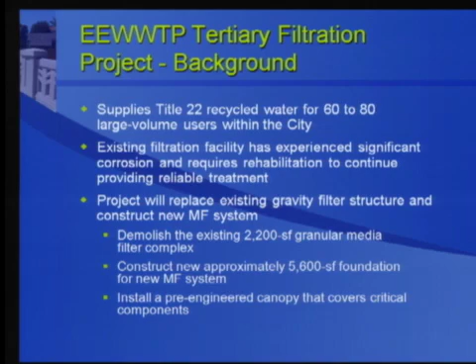I'd also like to point out that to address the comment from the board at the last meeting on September 30th, we are going to provide provisions for solar panels. This is a pre-engineered canopy, so we are increasing the dead load for the roof to accommodate future solar panels.

The El Estero wastewater treatment plant is located in the city of Santa Barbara. We're surrounded by Yanonali Street to the north, Calle Cesar Chavez to the east. There's a railroad right-of-way along the south part of our site, and Garden Street is really the main public access along the west side of our site. Between Garden Street and the El Estero plant is this industrial facility through here, and we'll provide some photos of the site from that industrial facility as part of this presentation.

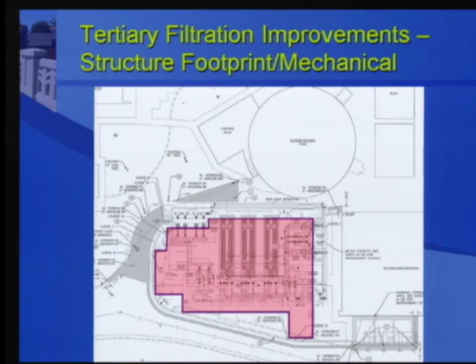This is a mechanical plan that shows the new MF facility on top of that foundation. Again, here are those new feed pumps replacing the existing feed pumps over in this corner. Also, we are modifying that perimeter road or access road to the east of our site, cutting into the curb on the east side and removing some of that vegetation. We'll be covering our process facilities with the canopy, which again will be designed for future solar panels. We will not be installing the solar panels as part of this project, but we are accommodating the load for the future.

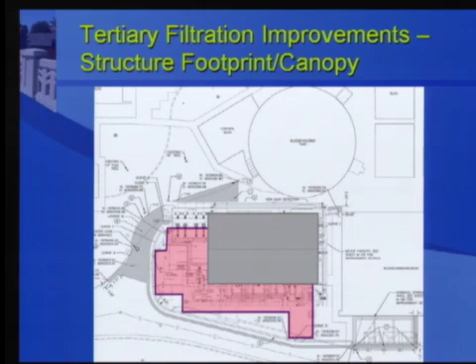One of the requests from our last meeting was that we provide a grading plan. This is what Lisa handed out at the start of this presentation. It shows the foundation as well as modified curb and gutter around our site.

One of the items presented at the last meeting was that we would be using gravel in this area to replace the existing landscaping. We had a meeting with the city last week, and plant operators indicated they would like to have service vehicle access in and around the MF facility. So the decision was made at that meeting that the gravel probably wouldn't provide good service—if it was raining, it would be difficult to drive in there. So we are proposing to replace that gravel with concrete so that we can have service access in and around that MF complex.

We have some additional aerials beyond what we presented last time. This is an aerial looking at a model of the MF facility from the northwest.

The gravel was replaced with concrete paving in and around the site. This is the new vertical turbine pumps. The existing vertical turbine pumps are in this area that will be removed and replaced as part of this project.

Again, this is the existing solids handling building. This building is a lot larger relative to our complex and provides good screening from the south of our site.

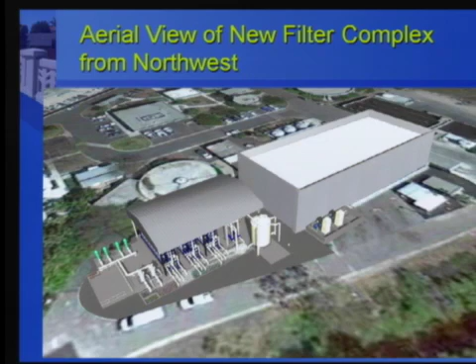This area along through here is the Laguna Channel. We'll provide photos further in the presentation that show views from the Laguna Channel.

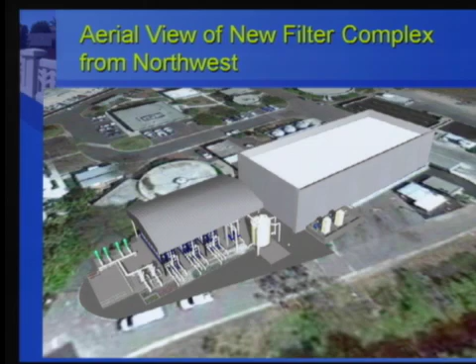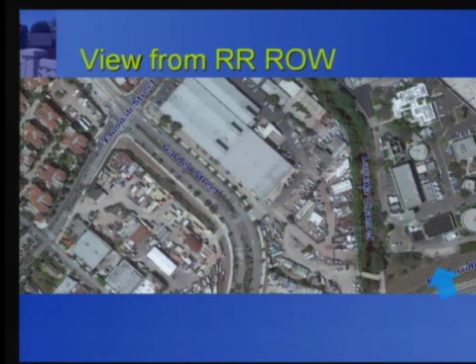The other area where there's potential public view is from the railroad right-of-way to the south portion of our plant. Here's the railroad right-of-way along the right corner of our screen. We've taken some photos looking into the plant. This was a photo presented last time, showing the solids building in the forefront, with a very small sliver of the existing filter complex visible behind it. We've taken several photos from that railroad right-of-way to show how well the solids building screens that filter complex. Really very limited views from that railroad right-of-way.

So at this point, I'd like to open up to any questions the board may have.

So you don't have any architectural drawings that show the four elevations, other than what we saw in that model? No, we don't, sir. Okay, and then in the minutes we had two comments that weren't addressed.

Oh, he needs the lights on, that's what it is.

One was to provide all four elevations, which we talked about, and item four was to study longer roof eave overhangs to provide weather and solar protection, and add more architectural character to the building. How did you address that?

One of the ways we've addressed additional screening from the sun and the light is we've dropped down that roof two feet. So we have the eave of the canopy, and then a vertical drop of two feet. We could only go two feet to maintain access to the equipment, and that's where we proposed additional screening through a roll-up shade or screen.

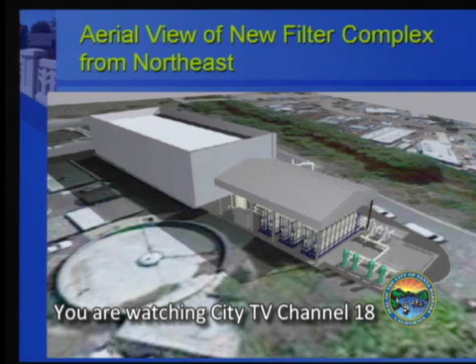Going back through the presentation to the 3D model, this is really the best view that shows the canopy, and we've added that skirt around the perimeter of all four sides. In this area it's dropped down two feet; in this area it's obviously more than two feet. That would be around the perimeter, screening the south, east, north, and west sides of the facility. Leave that image up for a bit.

Anything else for your presentation? No, sir. I will open up public comments.

Is there anyone from the public wishing to speak on this project? Having no speaker slips, I'll close public comment and turn it back to the board for questions of the applicant.

And Howard, I'll go back to you because you had a sound study question. I cut you off, see if I can remember. I've got a question in the meantime.

Did you contact the neighbors across the drainage channel and show them the drawings of the project and get their feedback? No, we didn't show them the drawings. We went on their property and got permission from both the owner and the tenant from where we took the pictures. The owner's response was, I don't think we can see your plant from our property. So we briefly explained it, but we did not show them any drawings.

I remember, you're up. Is your mic on? Oh good, yeah, never mind.

I'm sorry, it's on. The acoustical study—how do you simulate the sound emanating from the new building without actually having the equipment there? Do you know what the noise levels are? Is that a model you do? Yes, the specialist performing the noise study will be modeling the noise as it is now, and then we provided them information on the new proposed equipment, which they'll use to determine whether there are any impacts at the property line.

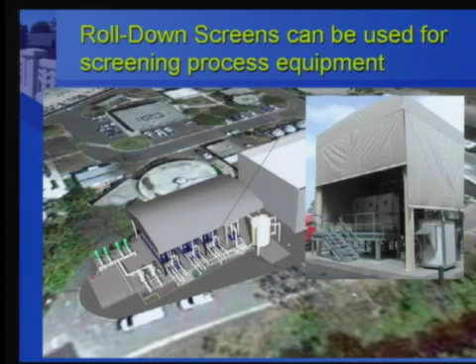There is existing landscaping along the south of this access road that just looks like scrub, along the creek. Is there anything proposed to be added there, landscaping-wise, to screen from the neighbors or otherwise? No, ma'am, not at this time. Our intent is not to go into the creek as part of this project or along the creek bank.

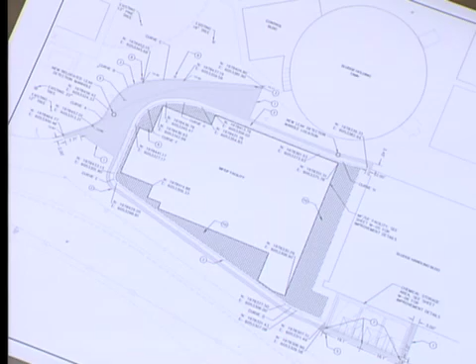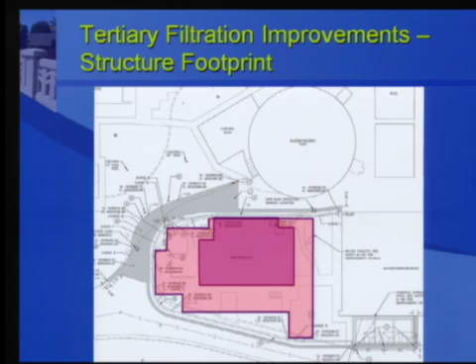Would there be implications to the creek? I'm not sure about the proximity to the creek or the setbacks involved. Our intent is not to landscape the creek as part of this project—we're staying to our project site and out of the creek area. Where is the boundary between your site and the creek? Is it halfway into the creek, or at the edge of the creek bed? Where's the property line? It zigzags kind of funny on this side. Do you have an aerial? I think that shows it better—one of the first aerials. Is the creek a man-made channel or a natural channel? This is probably the best drawing that shows it—right through here, the property line is right at the, just inside the curb line. It does cross Laguna Channel around where it's a little bit barren. It does a funny jog in there. Can we put that up? If we don't have property lines on that side... This is not it. Oh yeah, that's it. That might be it. Okay, Mr. Chair? Let's go to Gary.

I would say I can't make a fair decision today because I really can't review the plan. The presentation was nice, but I haven't had a chance to review the elevations or the height limit—I have no idea, you said the tank could be 5 feet higher. There are things I can't look at and review by just being given the grading plan, and I thought we were pretty clear about wanting elevations in the minutes. The other question I brought up was new pumps you're adding—the existing pumps are there inside a shelter, at the same depth you'll be when you have to replace those pumps and motors. Isn't the access available? Does the roof open up or something? It's actually an open area, so there's no roof over there now—those are pulled out vertically as well, but they've got concrete screening all the way around them. A concrete wall around them? It's a short wall, though, about 3 feet tall, but that short wall currently screens those pumps. Is that correct?

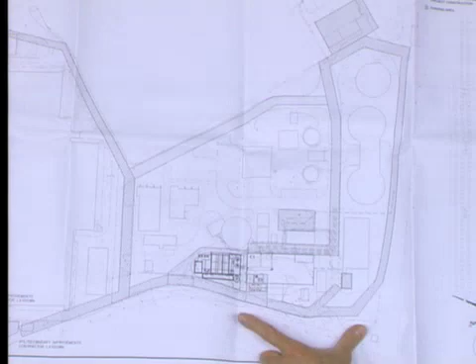And then one other related question. We raised this question and got a rough verbal answer last time, but the distance from this roadway to the other side of the creek where that fence was, where you took photographs, what is that dimension, roughly?

Guessing 70 feet. I think from the top of bank, from the creek on our side to the project is about 44, 45 feet. Oh, to the top of bank? From the top of bank closest to us is about 44, 45 feet to the closest area of construction.

Thank you. I actually had 2 questions. I noticed on your grading and drainage plan you commented that there was going to be stamped concrete. Do you have a color, a pattern? What did you mean by a stamped concrete pattern?

Just curious. This was a decision that was just discussed at our last week's meeting with the city, so we really haven't investigated that to a great level of detail at this point. It would be a natural gray color. Our preference would be not to go to stamped concrete, just to reduce the amount of cost. So our preference would be just straight concrete paving.

Okay, and then there was a fountain that was over here. Is there any history behind that fountain, like why it's located there? And since you're doing reclaimed water, did reclaimed water go through that thing and attract the birds and stuff like that?

I'm not sure of the history of the fountain. I believe it was just brought in by somebody. I don't think there's any great history to it, but I will have an answer for you next time.

Does it work? Is it operating? I think it's just sitting there. Was it ever plumbed? Was it ever? I have no idea, I'm speculating right now, so I'd prefer to just come back with an answer for you.

That's okay, let's go to comments and then we'll move on. Does anyone have any comments to jump in? I do have comments, but go ahead, Howard, if you're ready. Well, I'm not chomping at the bit to make comments, but I would defer to give my time to you to start it off.

Well, I think, in my view, obviously we don't have elevations, so that is an issue. But just in terms of what I saw from the 3D imagery and the photographs, and looking more carefully now at what's occurring between the proposed new work and the adjacent neighbor,

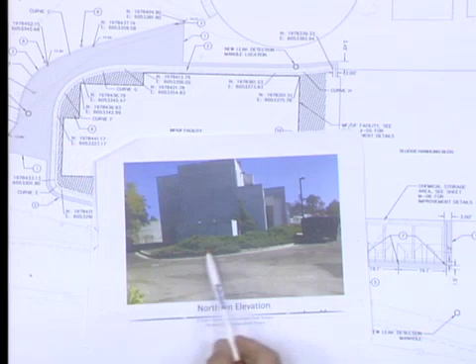I think some junipers would be nice to have there. There's parking right here and so forth. So I think that we should have some landscaping in there, especially where there's not going to be pedestrian or vehicular access all the way around here. There's not going to be pedestrian or vehicular access there. There won't be. There'll be a lot of action right here, I suppose.

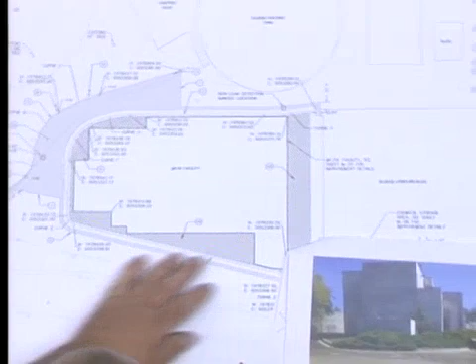And the other thing is I really would like to see the elevations. I want to know how high that tank is and how high it's going to go, if there's a ladder above it. The taller it gets, I don't think it's going to be as tall as this building. That is correct, it's going to be quite a bit smaller, but I still would like to see it. And I'd like to know where the skids are going, and just be able to review this project fairly.

So I'd like to know about the lighting as well. If you're going to add some lighting, or is there going to be lighting underneath the canopy, and is it going to be lit all day and all night, or what that's going to be? So there's information that we're missing, and clearly there's 110 pages of design that you have, so I'd like to see some of it. Thank you.

Anything else from that end of the table, comment-wise? Yeah, I'm ready. I'm not going to add to what was already said, because I agree with what Kurt and Scott said regarding the landscaping over here. I would also recommend you study this access road and the radius of this corner to see if you can actually get a crane to make this weird corner turn.

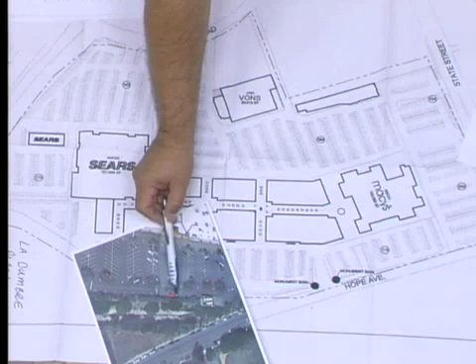Originally the property manager suggested out here, but I was by there today, and in my opinion it's dangerous for us to have a recycling center with this street traffic here, because people will be coming around this corner as they're recycling. Over here there's a lot more space, and it would be a lot better. So I'm in the process of talking to the property manager about allowing us to be in that area, which would prevent any danger regarding customers or our employees. Okay.

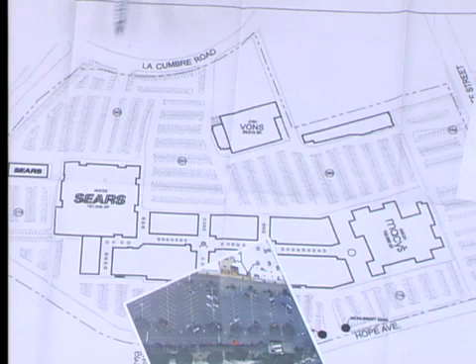Yes, that's a very good question. Originally we would have liked it in front here, and the property manager asked Sears, the owner, and they said absolutely not, because visibility is everything, plus it's safety for our employee instead of being in back where we have cash, and it opens up the door for getting robbed. Then the second spot was here.

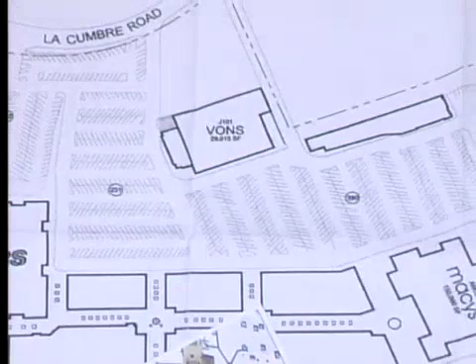I don't know if you guys can see, but it's an enclosure right at Vons and there's really no room. Plus it's really dangerous right here with this street as far as traffic. So the property manager, it was the property manager's idea to place us back there. They feel that's the best place for us to be. We are away from Vons, but of course Vons would do everything they can to let the customers know where we are.

Another question - it seems to be taking up some parking places. Will this create a parking need rather than take parking away? Is there plenty of parking at this existing facility? Have you done a parking study? The staff reviewed it, and it's okay for this building to take up a parking space. Depending on the ABR's desires for landscaping, we might be able to use another space or two. La Cumbre Plaza Mall has a surplus of 3 or 4 parking spaces, so we can afford to lose it.

Okay, I want to go to Howard and then to Scott. I have a question first - is this a compaction thing? The metal, is it metal?

What we have is a compactor on the side of our storefront. We open it up - it looks like a baler, if you will - and we put our material in there, close it up, and press a button. It compacts the material, keeps smashing it down, and then when it's full, we pull it out, tie it up, and put it in the bin. So it's not like the trash container compactors where they push it - it's just a little compactor.

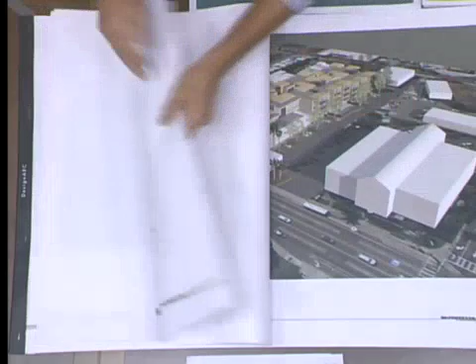But essentially what's happening is this existing building now spans over this driveway, comes back. I should start with the existing conditions. Existing building here that spans over this driveway. There's a second floor that spans over the driveway. It's basically office tenants. There's a stairway here, there's a second exit, and then another kind of an L-shaped return and another piece that spans over this driveway.

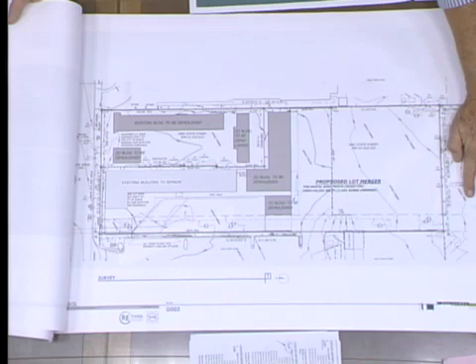This is an easement driveway that is to the benefit of the property behind here, so that they can actually drive out here, in and out, ingress and egress, and get access onto State Street. And then there's a little motel here, a real small little motel that's not really functioning right - a 12 room motel, little motor hotel with parking in the middle. Like I said, there's a stairway here.

So our proposal is to take down the back part of this building and the motel, parking back in this part of the site, and essentially build a new apartment complex in this area of the site that basically comes up and actually touches the existing building.

I think it's important to note that the whole AUD program is an incentive program that was basically put in place by the City Council to encourage the development of projects just like this. It is the average unit density. We are at the higher end of the unit density, but our units could total 811 square feet. Our units currently, as proposed, are 806 square feet. It's all 89 units of 2-bedroom units, so they're very small, compact units, sort of affordable by design.

And I think it's important to realize that, once again, this was one of the sites, along with others in the city, some of which you've looked at, that were identified as the optimal location for this kind of housing, because we're right on State Street, right on the transit line. We have a bus stop right in front, the adjacent property right here. Obviously, once someone lives here in this project, they will be able to walk to shopping, walk to entertainment. It's kind of the perfect location, really.

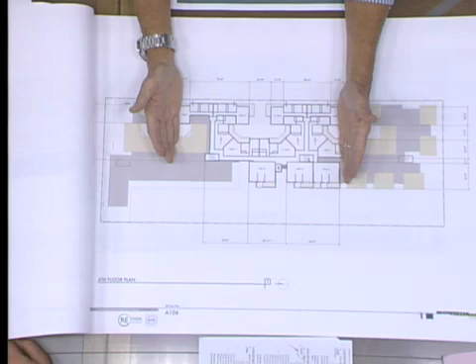We're also proposing on the 2nd floor this common area, west-facing. We're eliminating a couple of units here and having this kind of west-facing terrace, late afternoon sun, with a pool. This is not over the parking—this is actually over grade.

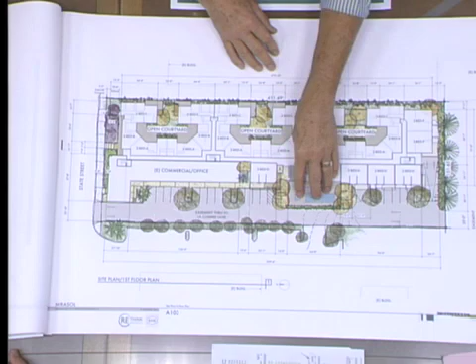There are 2 driveway accesses, so we have two levels of garage. This is the lower level of garage that comes down off the back, and then the upper level on top of that with some tandem.

I'd like to point out that we did this program for Greg in a little over a week—it was a charrette approach to get something in front of you as quickly as possible. We understand there's probably some T's that need to be crossed and I's that need to be dotted on the dimensions, on the parking, and so forth. We've done this before, we know we can get to that point, we know we have the ability to do that. We have enough room—these are fully excavated, basically full basements. And we will certainly have a conversation by the time we're done.

Tandem parking is clearly allowed in our ordinances—you just cannot assign those to different units. They have to both be assigned to a 2-bedroom unit, the 2 tandem spaces. But we'll get into those conversations with transportation at the appropriate time. What we're really here to talk about is the massing of the building. I don't think you guys are that worried about what's going on in subterranean garages anyway, but I just wanted to touch on that so we know where we're headed.

So we've already looked at these plans, and we didn't even get to the point of developing the total floor plan. These little tick marks on here just identify where the bedrooms would be and where the living room would be, so we know we have enough access to outside light and ventilation to make the plans work. We're convinced that we can do that. Once again, in the limited time we had to get something on your agenda, that was the approach.

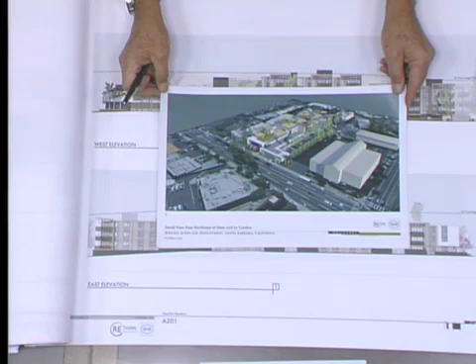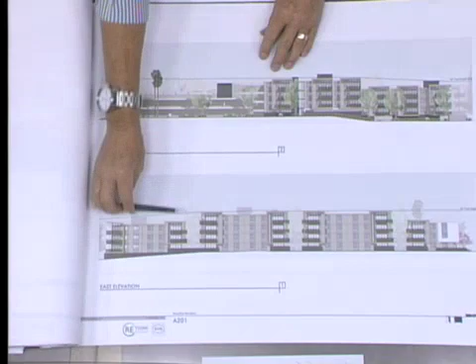But on this elevation, you can see these 3 deeply recessed courtyards, and we've shown those in atmospheric perspective, lightened to step them back. We're using these kind of cowls on the corner to enclose the decks on the upper levels. You can see how we're 3 stories here, 4 stories in the middle, and then back down to 3 in the back.

State Street elevation here. So this is the existing building, just refurbished. There's a very minor change - we're not adding any square footage, we're just kind of cleaning it up. Once again, kind of a mid-century 1960s building, and we're kind of imitating that with our new proposed portion here to the east.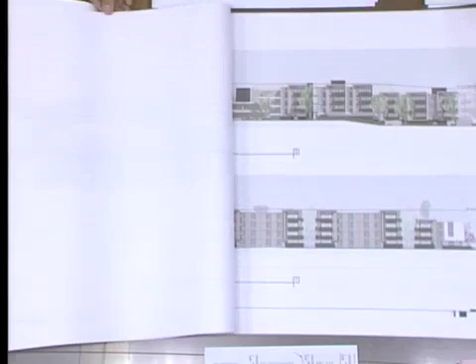Can you show where that outdoor living, that balcony was here or was it here? It's right here, there's a person standing on it. That's the 3rd floor balcony. There's another kind of walk along behind here to get out here, and then there's one that's kind of behind this. We've kind of done - it shows better on the 3-dimensional views. We're thinking it's a kind of perforated screen there that you walk by and it becomes the guardrail for the upper floor, so you get little glimpses of light.

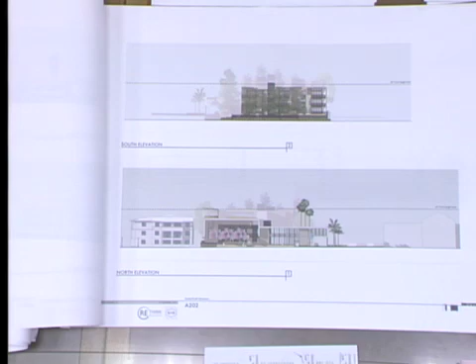And so you get a lot of activity on the elevation without losing privacy, because we're going to have a gate here, a ramp and a gate, so that people who want to come and go could come in right through this area. Like to visit someone could come in through there, ride the bus, get off over here and go right in at that location and get to the whole complex, or people living there could come and go as opposed to the other entrance in the back. The other entrance in the back is kind of next to the pool area - it's right here, and once again it shows real well on the 3D. This is actually guest parking, surface guest parking.

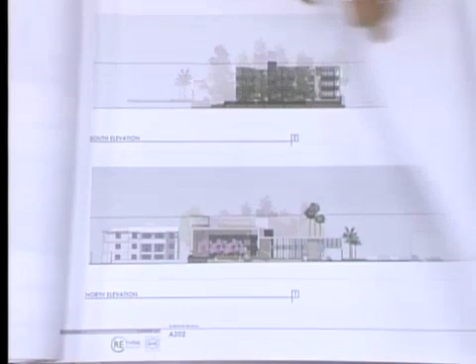We have one longitudinal section here. Apologize for not putting the dotted line on there, but it's the same as this, the long elevation. So it does fit within the 45 feet. See? Then if we go to those?

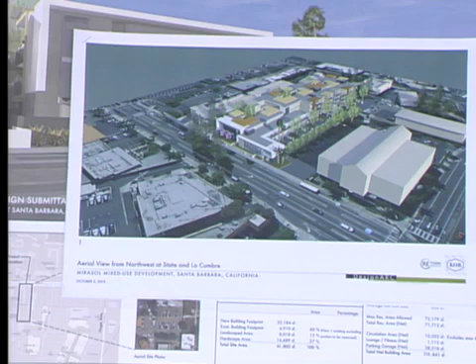So image number 1 is sort of an aerial view with the big building on the corner that everyone knows. In this particular view, Deddy was nice enough to share with us a SketchUp model of his project, so we've done some views with his proposed project that you've already seen on this model, and also some views with the existing church, just so you could see - that's the 60-unit senior housing project going on that site where the church is currently.

This is the State Street frontage again. So here's the existing building. This little box pop out is there. You want to see what it looks like on the site context photos.

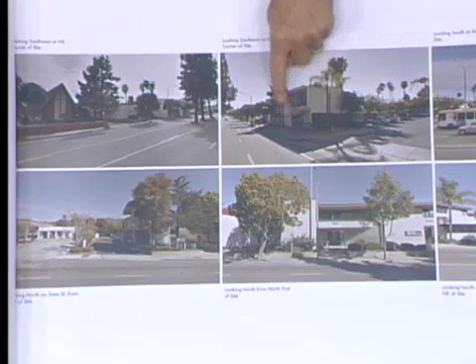That's painted right over there. Yep, we thought we'd paint it in color.

Actually, there's some old 1960s mosaic tile on the front of that building that has been painted over. I'm not going to tell you that we're going to restore it, but I don't want to scare you guys all too much in one setting.

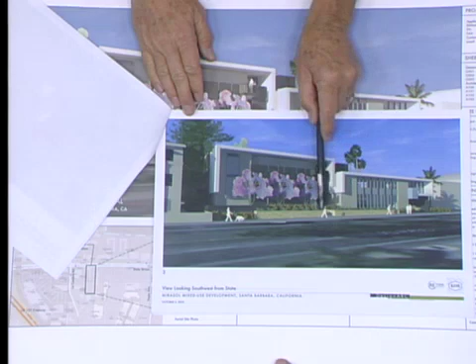So the existing building is just refurbished with the new addition. On another aspect, there were some comments in the guidelines for Outer State Street. When we come back with a full submittal, I think we're going to maybe move this wall back and have an opportunity for some benches for the public walking on the sidewalk. Perhaps we can have the front be a little bit more accessible to the sidewalk.

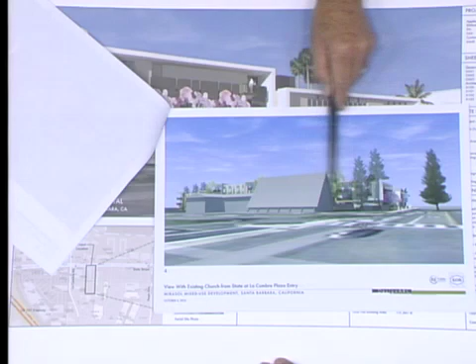Here's the view from down State Street looking up with the existing church. Really, the aspect of the building you're seeing here is 3 stories. It doesn't pop up to 4 stories until it gets behind this church, and then it steps back down. We feel that the massing really fits very well with the site and the existing buildings in place. This is what the project would look like with the adjacent project you guys are reviewing moving forward, assuming it does, so that our building is virtually invisible when that building goes in.

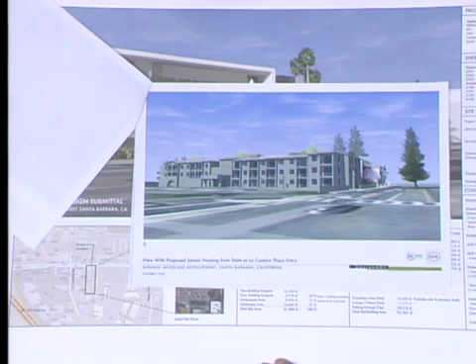But there are two pine trees that we're proposing to retain that are right on the site, right on the property line. They're actually on the adjacent property to the east, but they're so close to the property line that they'll be right in the setback between the buildings, which I think will be a very natural break between our project and the adjacent project to the east.

And the aerial view, once again. This view, I think, shows very well these east-facing courtyards, and those will also get a lot of south light in them as well.

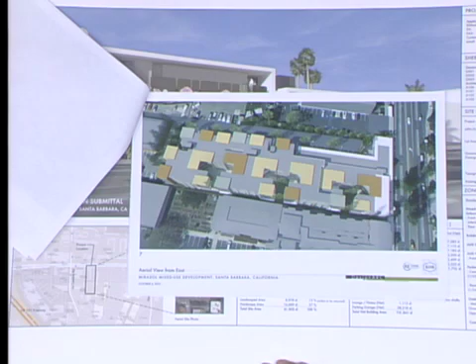The colors that we've chosen on this are very preliminary, but as you move up towards 5 Points, they've used a lot of Eucalyptus citriodora for the landscape and the parking lots, which are nice vertical trees, nice skyline trees. So we're thinking those would be appropriate for these courtyards and some of the surrounding trees, and if we did that, we would base the colors we're proposing on the bark of eucalyptus trees.

Tip knows about that - it's the same thing in front of his office. That may or may not stick for the final concept, but that's kind of the way we would approach it - not just random colors we happen to like, but something that works with the landscape.

It's just a view from standing on top of one of those courtyards, kind of looking out through, filtered through the landscape.

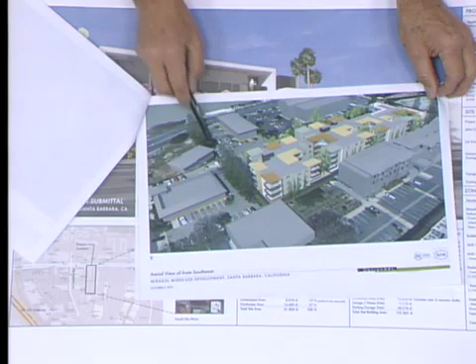There's also a very large stand of pine trees on the adjacent property. Once again, they're not on our property, they're on the adjacent property that we're proposing to retain, obviously. Another stand of them over here behind that gas station.

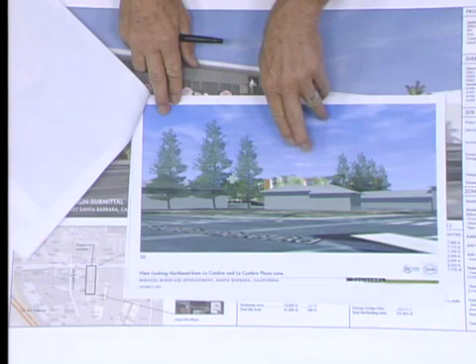So this is the view from La Cumbre, looking up La Cumbre Plaza Lane, and it goes back into the shopping center. This is that gas station that I think you recently saw coming back as a commercial building that's going to be actually out on the site, closer to the sidewalk with parking behind. I think you can see from this vantage point that that building will be virtually unseen by the time you bring a building out to the sidewalk.

This kind of shows how the driveway comes down. We've got surface parking, more or less where surface parking is now on the commercial building. Then it gives way to a little portion where we pop out for the pool. Then there's a grade break here that drops down fairly steep to this lower level, with two driveway approaches and some additional parking here.

This is the view from the south looking up towards the mountains. This is that stand of existing pine trees here.

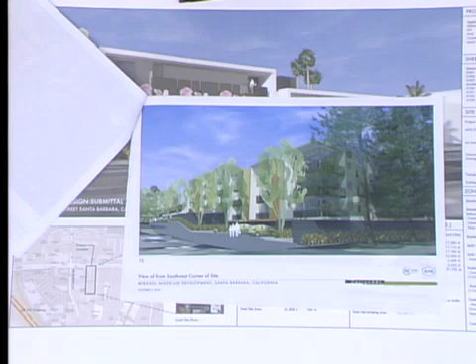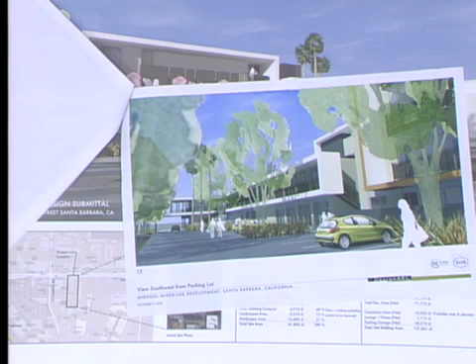That's a little bit of a close-up with the office building. It actually has a roof over it right now and a floor, but we're just proposing to connect that together all the way around and give it a little bit more of a concentrated look.

If I just conclude with one thing, I don't know if the board has seen this document, but this was a charrette done in support of the AUD, and some of the conclusions are: you have to have reduced parking, you have to go to 4 stories, and you have to have a certain mass of building to make it financially feasible to implement the AUD. Through this process, we've found that is in fact the case. So it's really important to me to hear specifically your feedback on the massing, to know if a financially feasible project is possible.

Thank you. Is that all for your presentation? Sure. Great, I will open up public comment.

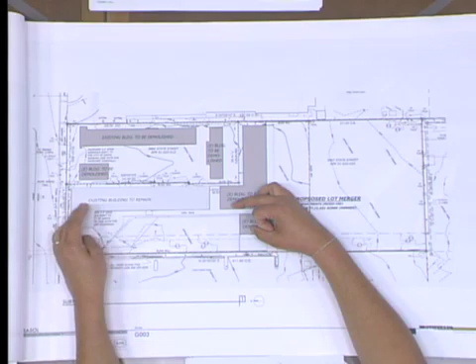Actually, I'll ask a question of staff right off the bat. I'll go to this site plan. So the way the AUD works, I just want to understand how the AUD unit works. You take the overall lot and times it by the formula of 63 dwelling units per acre, and you got your 89 units. You chose to demolish a portion of the existing commercial. Now, they're still retaining some of this existing square footage of commercial. If they chose to demolish this commercial, they still only have 89 units to work with?

Mr. Chair, that's correct. The density limitation is solely based on the area of the units that's privately controlled by the owner or resident of that unit. So it doesn't include common space, it doesn't include underground parking, it doesn't include commercial.

Where I'm going with my leading question is that if they chose not to demolish this existing structure and decided to keep this and this, they're still able to do 89 units with an average density of 806 square feet per unit.

806 units? 811, actually, 811. That is correct? That's correct. So it's to the advantage of having a lot with an existing building to work with and retaining that building, because this is actually retained as retail commercial space that they get the rent for, in addition to the 89 units that are elsewhere.

The retention of the commercial is allowed, and under the new growth management program, there's no small additions allowed up in Upper State Street. So the non-residential development potential actually went down with implementation of the general plan, but with the AUD, more residential is allowed up here.

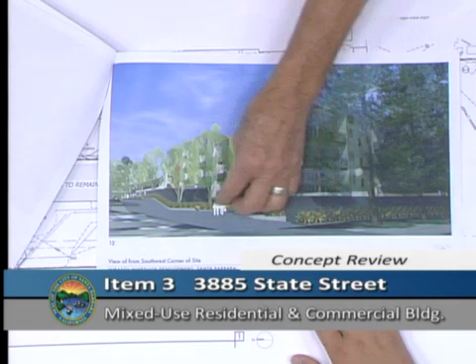It still fits within that, and that level of parking, because it goes back underground, the definition of it is still that it's a cellar or basement. And so this is still 3 levels of housing above a short story that is a portion of that garage. You'll probably see it on the elevation a little bit.

So the bottom level of parking is totally below grade. The upper level of parking is half, partially down. So let's go to that one elevation since we're there.

So we're talking this zone right here. Yep, that parking goes from here to back here. But there's 1, 2, 3 floors. But the garage down below, that's still considered 4th? No, it's actually, enough of it is buried that it's not considered a story. You take the definition of, 50% of the perimeter is more than 6 feet, that definition. So that garage is partially submerged, and it qualifies as a basement and not a story.

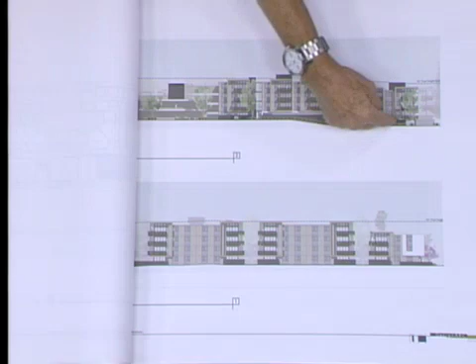So for our discussions, we can approximately say 7 feet between the asphalt and the underside of this thing? Yeah, not a full story. Those are my questions. Who wants to go next?

So back to that question, but visually, you cannot fit another floor because the garage is 7 feet above ground. You couldn't put another floor anyway. Yeah, that's right. That's why you said 3, but actually 3.5.

By definition, it's 3. It's 3 over a basement, and it's still well below the 45. How about a daylight basement? It's not really a daylight basement. That's not our definition, that's staff's definition.

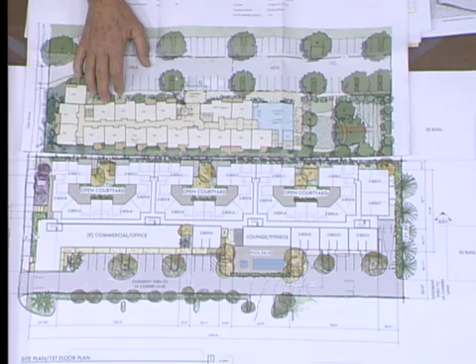The limitations in this driveway easement area—are you able to provide, say, plant screening or planters along that side, like we typically require for around parking and driveway areas? I knew that question would come up, and the answer is no. It's an encumbered easement that runs through here. It has to be the width that it is. So we can't do—the good news is there's a nice planting where we've actually kind of shown what's on the aerial.

And this is the back of that gas station back here. Presumably a new project with the parking back here is going to have that, but the unfortunate reality is that we really can't do much. If we put a new wall there, we could probably do some very small vine pockets and grow ficus vines on it or something like that. But we don't have the ability to put a 3 or 5 foot—

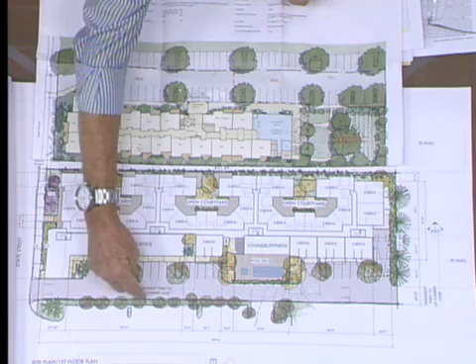But you can't put a wall. You can put a wall on it—there's actually a wall, an existing wall on it right here that holds this second floor over. And there's another one here, and there's actually a wall all along here that we intend to kind of enhance. And once again, this tree cover does a really nice job along this, but I think we would probably propose to do some vine pockets and make that into a total green wall for that very reason.

I think those are my questions. Yeah, can I ask some questions? Go ahead, Tip. I'd like to ask some questions about the concept, the open courtyards.

It seems like you have 3 courtyards, and who can access the courtyards? On the ground floor, all the residents—there's 1, 2, 3, 4, 5, 6 residents on the ground floor that access that courtyard. On the upper floors, we have the balconies that look down into those courtyards.

So that means the second, the third, the fourth floor are just looking down to the courtyards. That's right. And the way you approach all the units is from the interior corridors. That's correct. And then everything opened up to the courtyard. That's right, because it's an elevator building, all of the units are required to be ADA accessible and adaptable.

So that way these can actually—but down here, you could actually have some steps if the grading works out, such that you could actually kind of have a little stoop on the open space on the courtyard side, because their ADA access is from the back. Yeah, Stephanie.

What is the regulation for the solar access ordinance for AUD projects?

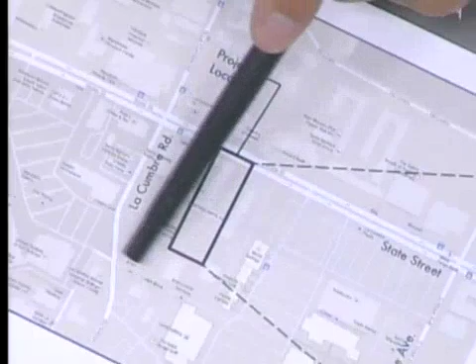This is accessible all the way through to La Cumbre Road. If you go back to La Cumbre Road, that's where the AT&T store is. On the vicinity map, here's the subject parcel, here's La Cumbre, and here's the gas station. The only way to get to the back of this is from private property, that's not a street, that's a driveway, and it goes by the AT&T store.

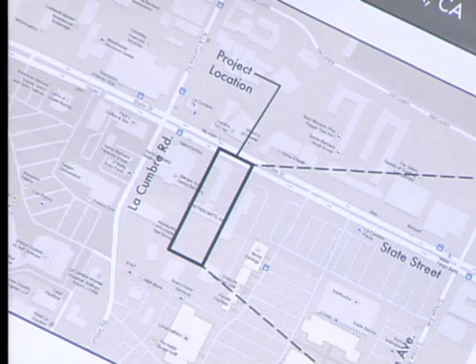So there's no way from these buildings along La Cumbre Road to get access onto this? When Barry Burkus developed this, he granted himself an easement, which is right here. So that project, the Galleria, has access to use this as well, at this location. So that's going to remain.

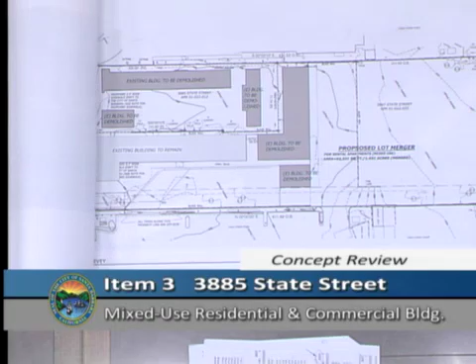How much parking is dedicated to the commercial space in this one? It's about 36 or 37 spaces, at 1 per 250 square feet of remaining area. Of course, we'd have the added benefit of overlapping use in the evenings when the offices are closed, which would be available for additional guest parking for the residents. That's it for my questions. Thank you.

Howard, do you have any questions? Yeah, I'll go up and then I'll go to these.

Could you please explain what's happening on the State Street facade, both the existing legal non-conforming setback of the existing building and the proposed setbacks of your building? Not the eyebrow, but the face of the building - is that a 3-story face, and is it one setback for all 3 stories?

Right now, there's going to be a 3.5-foot dedication that we're losing on the front. We're providing a 10-foot setback to the face of the balcony, and right now it's a 13.3 foot setback to the face of the building. So we're losing 3.5 feet all the way across the front. The existing building is at a 6'3" setback from the property line, and that's going to remain.

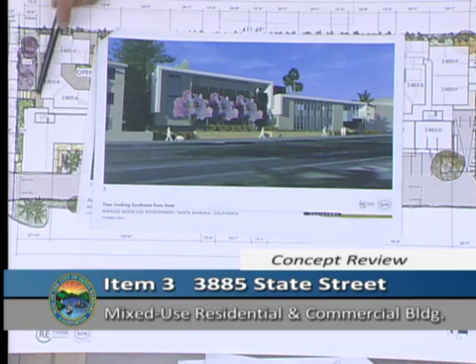So what we're proposing here, and we could more fully develop this, is we want it secure enough that people walking on the sidewalk can't just jump over this rail and go back into the project. We've shown maybe some steps, and we'd probably have to develop a handicap ramp - we haven't got to that yet - but there would be an entrance point with a keypad entry, so you could get in and go up the stairs, or walk down to the elevator and go up anywhere in the building. So there are 2 points of entry, one here and one here.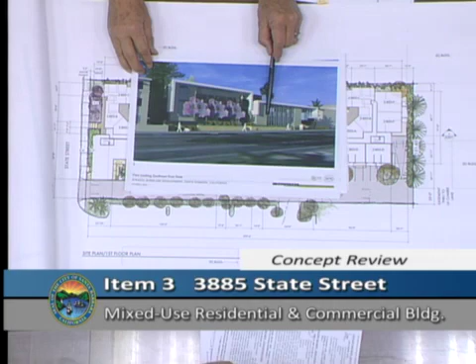That face is 3 stories high. The existing building is really a fairly tall 2-story, with the lower floor at about 11.5 feet. We're doing 9 feet, so our 3-story here is not significantly higher than the existing building, but enough to have a nice architectural break between the two.

So the proposed building is the same setback on all 3 floors? Yes. And the Eastern block is a little bit ahead, a couple feet. Correct, and the balcony too. I see.

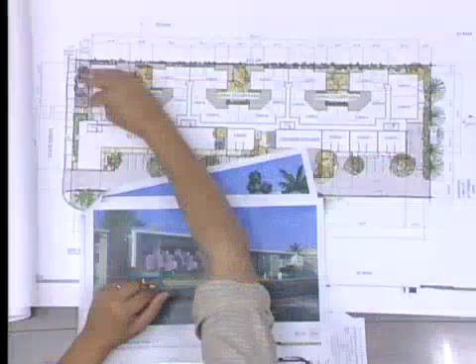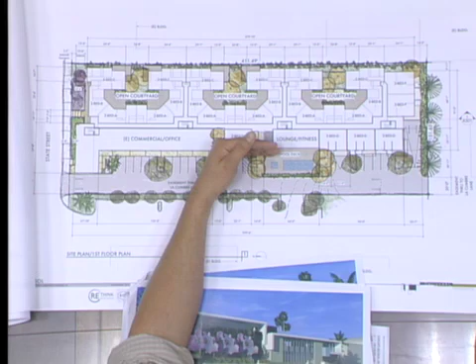Another positive is the massing, in the sense that you were 3-story, up to 4, down to 3. The one concern I have is the 4-story units along this end creating a very tall vertical wall here. It's just something we don't see yet in Santa Barbara. There might be a couple isolated things, but looking at the 4th floor, no one wants to see you lose the units, because that's potential profit or potential housing units, or actually 3 less cars on the 101 freeway because we're providing housing instead of in Ventura.

But this becomes a 4-story vertical wall here and here, with a pool below. So the direction I would like to encourage is to lose these 3 units and create that kind of setback here, like you have at this end and at this end. I'm not too concerned about the 4 stories here and here, because of the massing of the other building and relating to the other neighbors.

So it's a well-designed project. You explained yourself very well. The thing we'll be looking at is to try to keep it Santa Barbara as much as you can, and I love the fact that you had some Santa Barbara sandstone along here. You probably got Gary's vote that way.

So those kinds like of... deja vu all over again, isn't it? But you see, we never had to say it. You just actually threw in the sandstone. It's like, oh, it belongs in Santa Barbara.

So, mildly, somehow I think there's something wrong in the math, in the fact that you get to retain so much of your commercial space and keep 89 units, and that if you chose to keep this commercial spot, you still would have had 89 units.

It's our job to beat back the aggressiveness of these projects and make sure the scale matches our community. And the massing is the concern that I have along this realm, and anything to pull this back anymore would help. Those are my comments.

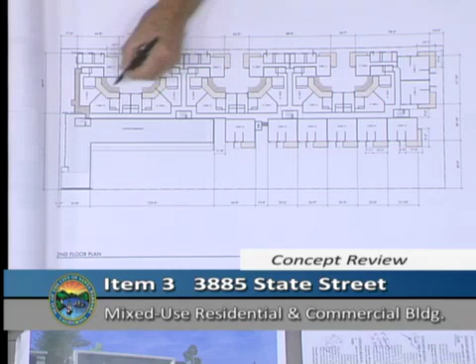Quick question on the second floor - is this just a drafting error, or are the balconies really... No, that's just showing the terraces down below. Gotcha. There'll actually be a fin dividing, because those are two units.

I think the general parti is very clever with the interior courtyards, and I like the notion that they're very well landscaped. Hopefully there's enough light getting down in there. On the whole, I'm supportive of the project. Thank you.

Gary? And then we'll go to the other end. I'll be a little opposite.

I really don't think that the three-story works. I think we need to consider human scale, and the walkability of this part of town. Rather than saying we're just a little bit taller than this building, we should have said we're just a little bit smaller than the existing two-story building. Rather than make everything bigger, perhaps we should have made this a little more diminutive than this building that's oversized.

But you went the other way, and went a little bit larger. I have issues about the massing of this. I think there's light and air issues with how these units are going to work and how tight they are to the proposed building next door.

I was looking at some of your drawings, and I'm noticing that there's no fenestration at all on what I guess we'd call the south side, as it comes into this building right here. It seems like there are opportunities for light and air.

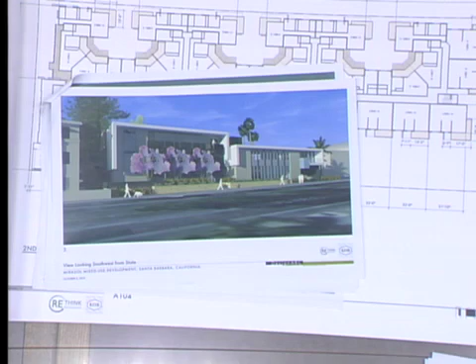The State Street guidelines, I think, should be adhered to a little bit more. I'm concerned with this - we're talking about the balconies, but in reality, with the building protruding all the way down almost to ground level out here, it still looks like the whole building is set forward. Even though you say the wall is back 15 or 16 feet, it really isn't, because of so much projection that's out. I'm concerned about that.

I'm concerned about this walkway being directly on the sidewalk without a landscape buffer, but you did mention you were planning to maybe move that back, and I'd like to see that. I'd like to see a little more human scale elements to it, like I was saying earlier - it does seem very large to me.

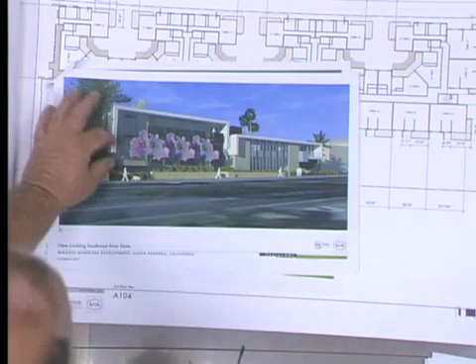I, for one, will be looking for reductions. So, thank you. Howard? And we'll end with you.

I think this project is well designed - it epitomizes what the AUD is really all about. It is in a good location, close to transportation, shopping, work. All those reasons are good.

My thing with the AUD - I support the AUD, but I also think that although that's a statute, our purview is really to make sure this has a size, bulk, and scale that's compatible, that is human scale. So there's somewhat of an override in my mind of the AUD with our design guidelines. I don't know what those are yet and how they impact this project.

The idea of making the two buildings sympathetic to the 1960s, I understand that, but my preference would be to make them more contemporary. They are pretty contemporary as they are, but I think the hood that projects over State Street is a little much - it kind of overshadows, creating a dark shadowy recess, ominous, as opposed to having a facade which is sunny and light.

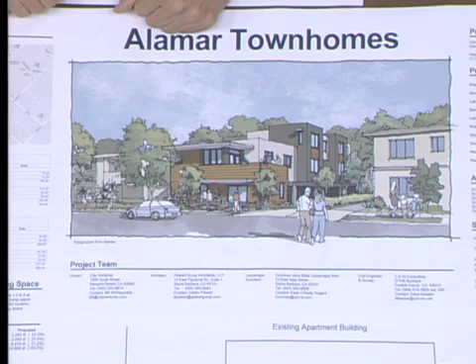Mr. Chair, board members, we're back to share with you a change that we made to the project. I have little packets here that just show what the previous design looked like, for reference purposes. So primarily, what's happened is that we had several meetings with city staff to discuss the project, and one of the issues they wanted us to take a closer look at was the setback from the top of the bank of the creek. You'll recall that previously we were adhering to a 25-foot setback, and there's a line on these drawings showing where that 25-foot setback is. They really encouraged us to look at whether we couldn't increase that setback to 35 feet.

Before we go forward to the Planning Commission.

So what we did was we took a look at unit number 4, which previously extended out an additional 10 feet there, to see whether we could come up with a 3-bedroom unit that would be 2 stories in height. The way we approached that was to basically take out the 2-car garage we previously had, and provide a 1-car covered garage, plus an additional parking space adjacent to the 35-foot setback. That's how we were able to continue to have a 3-bedroom unit, which is very important to the developer.

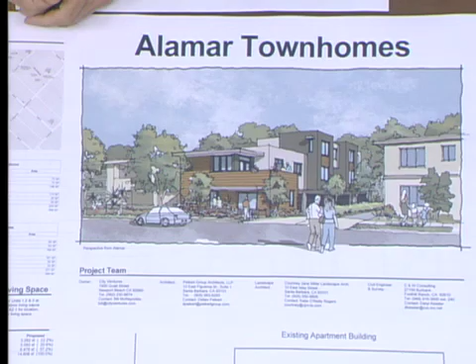As you know, these are all affordable units, affordable to moderate income buyers. But we felt that we could live with the 1-car parking garage as long as we could add an additional parking space, which we were able to do, and we have sufficient room to do the maneuvers to turn the car around so it comes out of the driveway front first.

The unit's habitable space is around 1,250 square feet. So I'll just walk you through what the floor plans look like and then the elevations.

Over here you can see the ground floor plan with the living and combined kitchen dining area, a stair in the middle, and a little powder room as well, with the entrance immediately adjacent to the garage. One of the things we're doing is providing some outdoor living space adjacent to that parking space, with a sliding patio door that provides access to it.

On the second floor, you can see the arrangement of the 3 bedrooms: a master bedroom with closet and ensuite area, and a second bathroom for the other 2 bedrooms adjacent to it, with a hall, stair, and the usual washer, dryer, and linen setup.

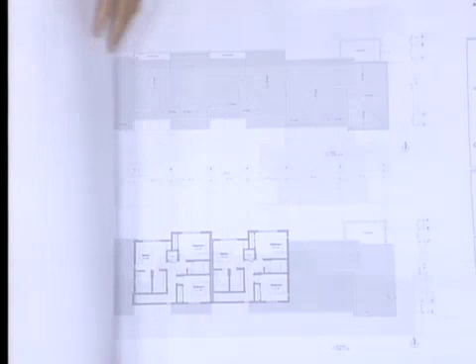The remainder of the project has not changed, but here with the elevations you can see how they've been affected by this change. I think you can see we've maintained the overall character, the contemporary styling of the building, with a combination of stucco massing and clapboard siding on some components, and an aesthetic arrangement of the windows, etc.

Back here you can see how we have that patio door adjacent to the open space that now would be adjacent to the parking space, again working with the arrangement of the fenestration elements, etc.

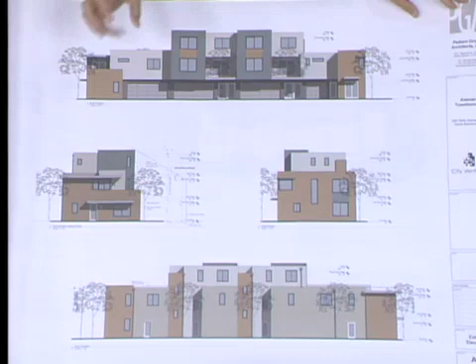I guess you can see all of the elevations there. The back elevation, same thing: the siding kind of wraps around the back, again breaking up the mass at the rear of the building.

Then the landscape plan - Courtney will talk about that. So the changes to the landscape plan are pretty minor. The building was pulled back here, away from the setback, so we filled that area with additional native plantings. We also now have a small private open space area shown here for Unit 4, and right now the plan is to have that be something permeable like decomposed granite, with a hedge for privacy here, and a parking stall added to accommodate this unit.

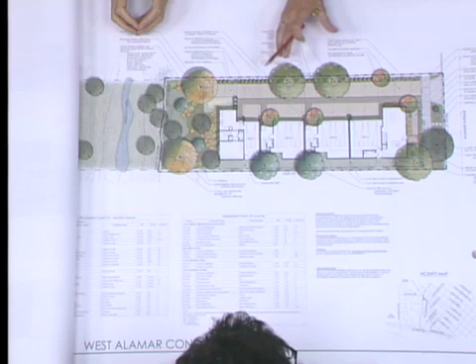The other thing we did, which came from comments from the traffic department, is we had to pull these planters back. If you see the light gray lines here, this is where they were before, and we had to pull them back by about 3 feet. I'm confident that we can still have small trees here, given the height of the overhang, and still have enough planting to make this space feel nicely shaded and lush. And that's it.

Thank you. Let me go through the... I guess we still have the backyard, so that would be only comment too. Yeah, one of the things the previous unit had was that upper level deck, which we no longer have, but now we have this on-grade outdoor living space there. And they still have a backyard here as well.

So, I'm sorry, and just one last comment: after this review and the comments that we get today, we'll be moving forward to Planning Commission hearing, and your comments will be forwarded to the Commission.

Okay, so I'm going to go through the minutes of the previous meeting, and if we want to carry some of those forward just the way they were written, we will, and if we want to alter them, we can.

Number 1 was: a majority of the board finds the proposed modification acceptable with no aesthetic impacts for the surrounding area. So there's no change to the design, and that was this whole front section? Yes. Okay, so that's probably going to be carried forward just as written.

Number 2 is: the board is evenly split regarding the supportability of the proposed cantilevers. If the board remembers, there is this cantilever that happens for the second and third floor over the garage, 5 foot. Yes, it's okay.

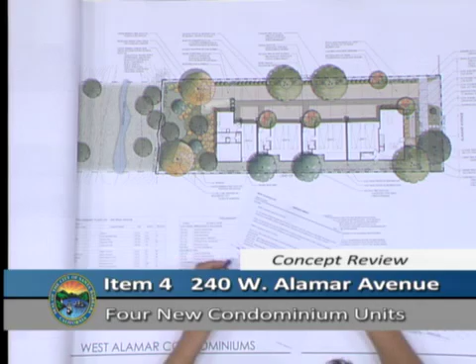Good memory. 3, the board unanimously finds the proposed third-story element was acceptable as submitted. Ununanimously? Unanimously finds. Anonymously? Anonymously finds. What was the unanimous thing? It has a U in front of it. I think it's just a typo. I think unanimous does have a U in front of it. Okay, unanimously finds. Well, what is the third-story element that's acceptable? The 3-story, the board, 3-story in the middle. Yes, acceptable as submitted.

Compatibility considerations as follows: some board members find the project's general basic concept, design, and detailing are well developed and compatible with the neighborhood, while other board members find that the architectural style needs further study. Applicant to return with photographs to show the 3-story design is compatible with the surrounding neighborhood.

And that was A. B, the board is evenly split regarding the project's mass, scale, bulk, and height. C, there are no negative adverse impacts to the adjacent city landmarks. D, the design responds appropriately to the established public vistas. E, majority of the board finds the project design provides an appropriate amount of open space and landscaping. I'm just saying we can carry all of them forward just as written, but that's just my 2 cents.